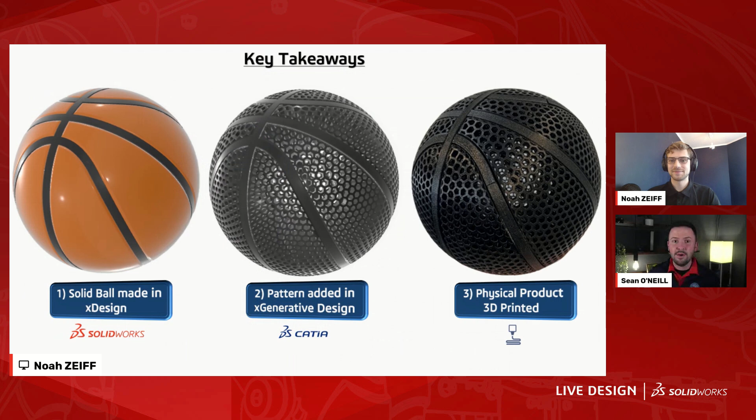So we're going to spend about 5 to 6 minutes per takeaway. But let's get to your first takeaway, designing the basketball here in X Design. But again, a lot of the stuff I'm sure you'll talk about is also applicable in SolidWorks. So yeah, let's take a look at this first key takeaway and see what you had to show us here. Let's do it.

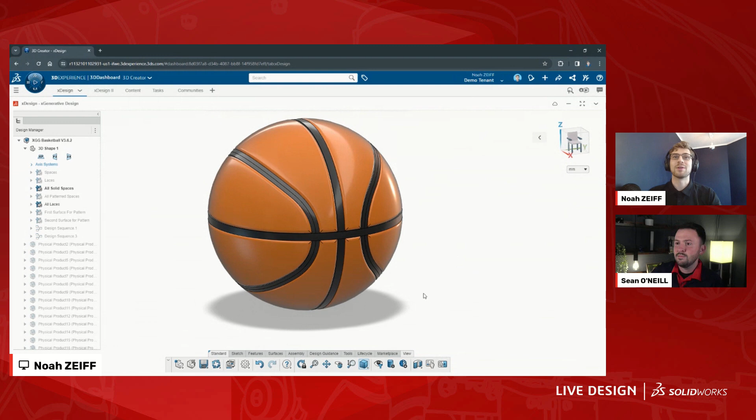So here we are in X Design, again, our fully cloud-based modeling tool, so no download required. And this is a parametric modeling tool, which means it has a lot of overlap with SolidWorks, meaning you have those extrudes, those revolves, those fillets, and many other familiar tools. Now, to use them to design this basketball, it honestly wasn't too crazy. This is a pretty simple shape. It's got a lot of symmetry to it.

In fact, all I really had to do was model up this small portion of the ball and just mirror that over a bunch of times until I got the design I liked. So that was pretty simple from the outside, doesn't look like much. But if we pan around and look at how these pieces connected, how I tried to do that, it got a bit more complicated.

And if you're watching this and you're kind of confused, you might be thinking, well, I've seen people 3D print this basketball. They always do it as one piece. And that's definitely true. I tried to challenge myself here and do it in pieces for two different reasons. The first was I wanted to see if I could print this basketball with absolutely no support. So I was using a flexible material to see if I could get this thing to bounce.

And I was using a single extruder 3D printer, which meant all of my support material would have to be in the same material as my model. And if you have flexible support material and a flexible model material, trying to break those away, it's like trying to pull apart two rubber bands that have been glued together. They kind of just stretch apart. They don't break away. So that was the first post-processing step I tried to avoid.

The second reason why I went this route was build volume. I wanted to make these files public, and so I wanted to see even if people with smaller 3D printers could split these parts up even further and print the largest basketball that they could, get it as close to the real thing as possible. So those are my two reasons why I printed in pieces.

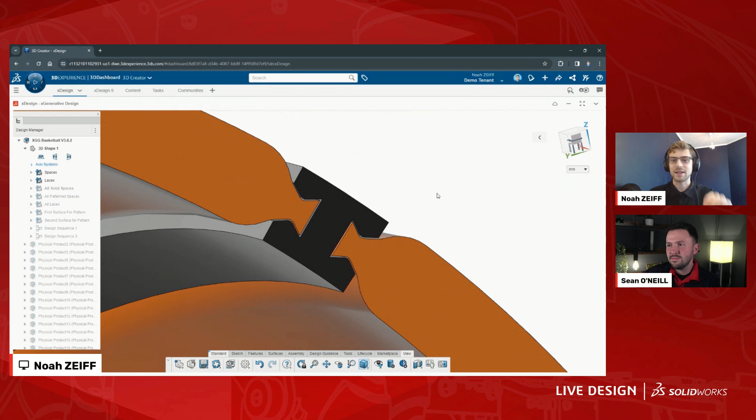I also had constraints when it came to designing these interlocking mechanisms. Yeah, this seems very interesting. Yeah, the first constraint was I wanted no glue. I didn't want to get messy and have to buy some really expensive, what is it, that Krazy Glue that is really good for 3D prints. I wanted to just make these snap together, make these fit together, as easy as possible. So that was the first constraint.

The other constraint was all of these pieces needed to have a flat bottom surface so that it could stick to the build plate of my 3D printer really well and it wouldn't get knocked off. So for these orange pieces here, I made sure to have this flat bottom piece that could stick to the bed. Same for this one. And for these laces parts, I used these as the bottom faces. I could have printed on either side. There would have been an overhang in the middle here, but I made sure that that was a short enough distance so that my printer could bridge it without needing any additional supports.

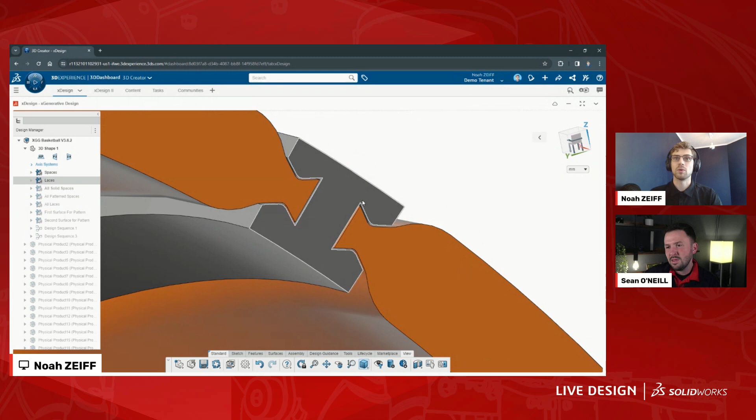So that was really kind of a driving factor throughout this first takeaway: having my manufacturing method in mind as I was designing this. In this case, 3D printing was my manufacturing method. So DFAM, design for additive manufacturing, was the biggest thing throughout this first takeaway. Yeah, and this isn't the one in the thumbnail, right? This is like a standard basketball. You wanted to get to this one first, as you mentioned.

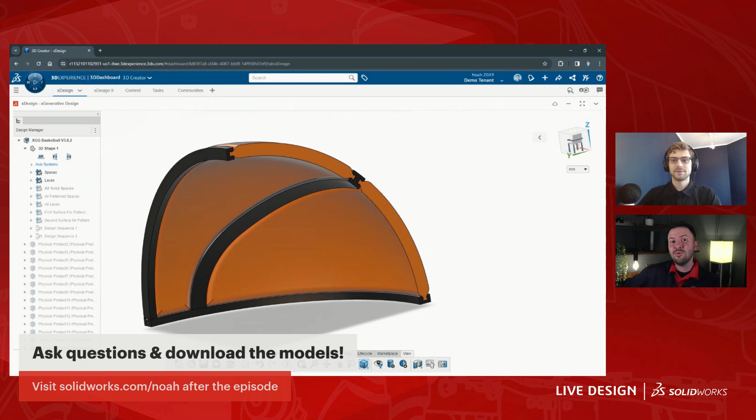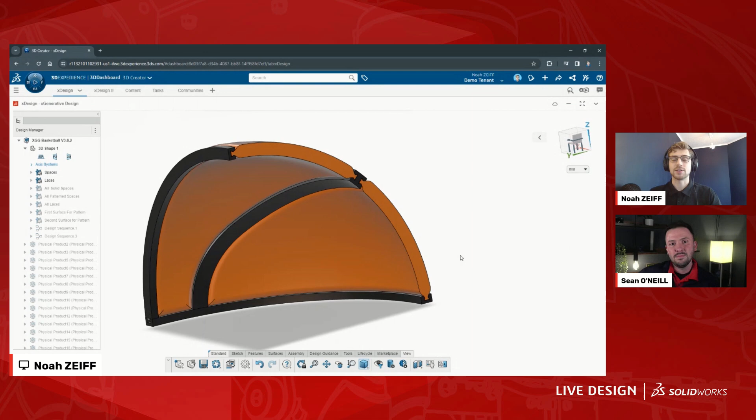Let's actually get to your second key takeaway, which, Noah, we've mentioned it. It's very inclusive inside of the thumbnail and the marketing for this episode, and it's actually adding intricate patterns to your designs. I think this is one of the biggest takeaways, honestly, of this episode. Definitely. So like you mentioned, Sean, I added all these patterns using a different application. It's also fully on the cloud, and it's called X Generative Design.

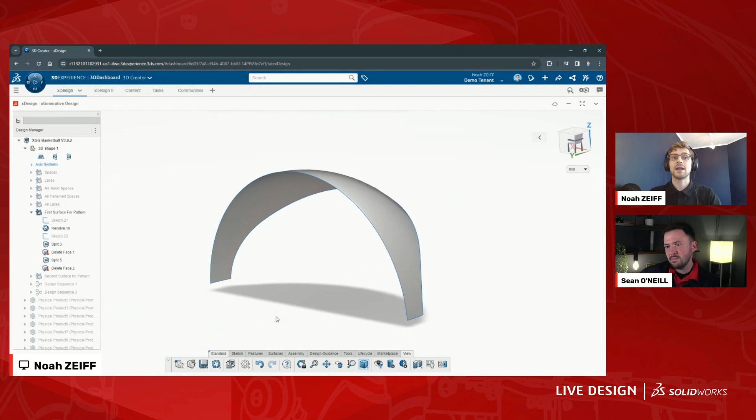Okay. And the great part about it is it's connected to the regular X apps like XDesign, XShape, and others. So I can take geometry straight from XDesign, like this pattern here, for example. So this was made fully in our parametric tool XDesign, and I could bring it right into X Generative Design through an app switch. So that's kind of the beauty of the platform, bringing all of these design tools together. And the reason why I'm doing this is because with this new app, X Generative Design, I have the ability to design algorithmically. And you'll see this is very different from typical parametric software like SOLIDWORKS or XDesign.

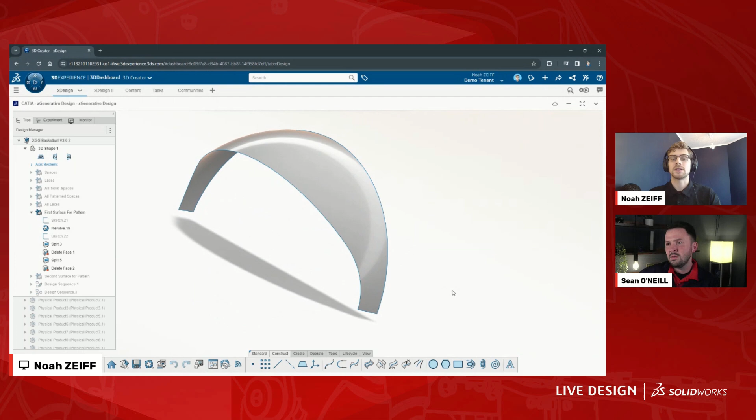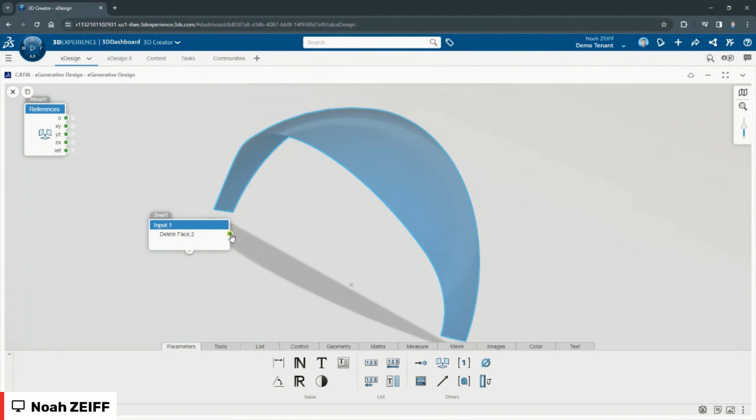Basically, I can add a design sequence, which is going to act as kind of our design manager, where we can house all of our features. And then I can do things like insert nodes, which are similar to features in SOLIDWORKS. And I can have this input node point to our surface. Mm-hmm. And then we can do cool things like add a triangulate node.

And what this is going to do is it's going to split up this surface into triangles based on a length I specify. So I'm going to say 10 millimeters. And just like that, we have split our surface. And for any SOLIDWORKS users watching, you can imagine how long this would take to do in a regular parametric software, how many sketches, how many lines, how many constraints you would have to make.

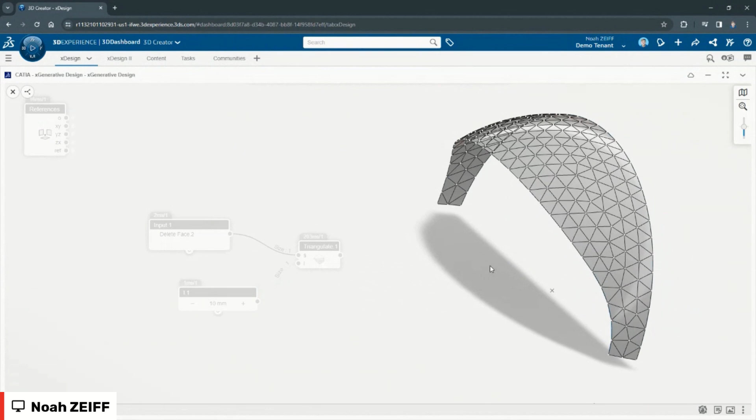So that's the beauty. Yeah, just to give like a few seconds of commentary. I know you aren't necessarily saying don't use SolidWorks or only use this tool for your designs. You would never only use this tool for your designs, but for certain architectural applications, certain, as you see here, Voronoi patterns, certain very pattern-rich, intricate designs, like we saw with Bowhead Corporation during our What's New launch, those sort of intricate handle designs.

In SolidWorks, you wouldn't be able to do this quickly, and again, algorithmically. So it's an interesting way to design certain parts, certain subsystems for sure. And these end parts can be put into SolidWorks models as well, which I think is really cool.

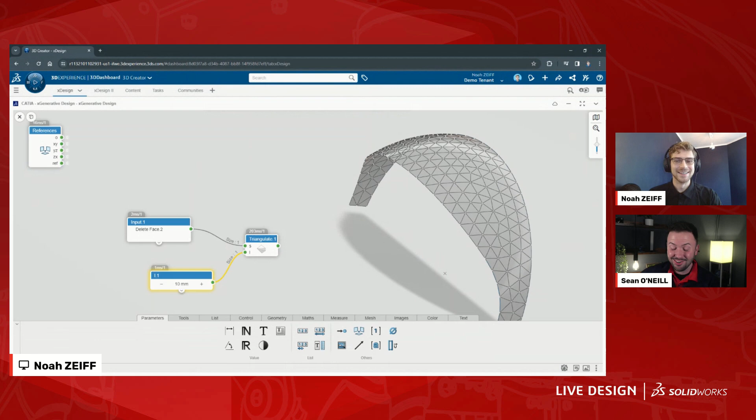Yeah, that's a great point, Sean. It reminds me of, I'll shout out Darren Grosser from GoEngineer, because I attended his session at 3DEXPERIENCE World, and he used this tool, and he says, you can do this in SolidWorks, but should you do it in SolidWorks? It's a good question. You know, it would take long. Yeah. So that's the beauty of algorithmic design.

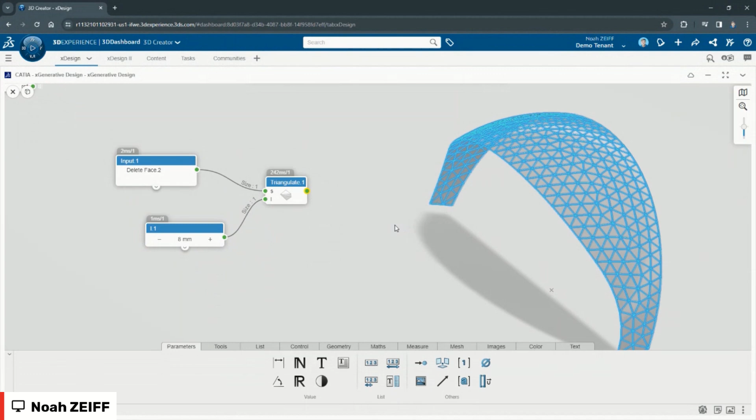And if I wanted to change this to 8 millimeters, you could see it updates pretty snappy. So like you mentioned, Sean, it's just a good enhancement for your regular parametric tools. But there are parametric nodes right here in xGenerative Design. So I can use the fill command, and I can fill all of those triangles I just made. I can also assemble them and bring them together as one mesh.

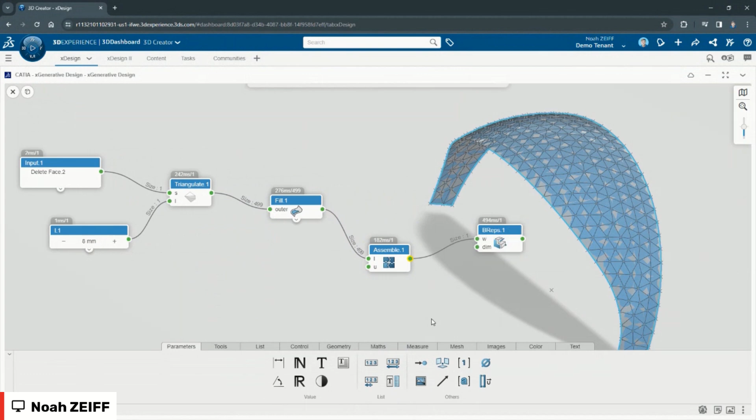And one of the other really cool things about algorithmic design is I can highlight sub-elements, which means I can highlight all of the faces, edges, and in this case, vertices of our geometry. So I'm going to take our geometry so far, put it into this sub-element. And now since I've highlighted all of the vertices, we can see just the vertices have been created. And now we can actually reference those to make our Voronoi pattern, what we've seen in the thumbnail.

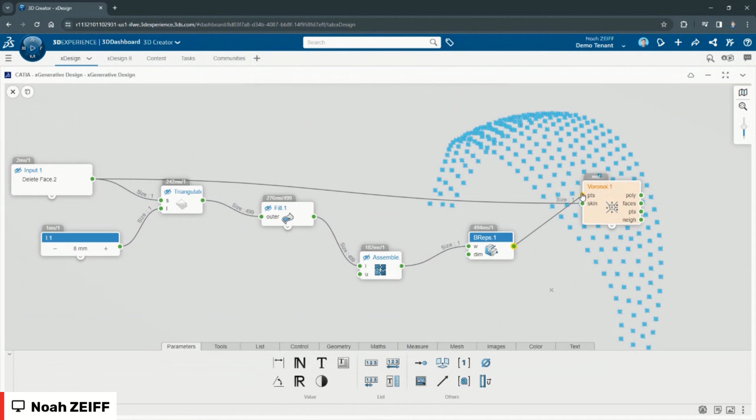So I'm going to create a Voronoi node. This is similar to basically making small hexagons at each one of these vertices. And I'm going to generate them on our initial input, which is that surface. So for our skin, that's going to be the original surface. And for these points, it's going to be all the vertices we just created. And now we have the beginnings of our pattern.

That's awesome. And it's following that same surface, which is one of the hardest things to envision modeling. If you come from, like a lot of us do, a parametric way of doing things, a very ordered chronological way of adding little shapes here and there and cutting away at them. It's a very simplistic idea of what parametric modeling is. But yeah, that is super awesome and easy to update as you switch in and out of these modes. That's really cool.

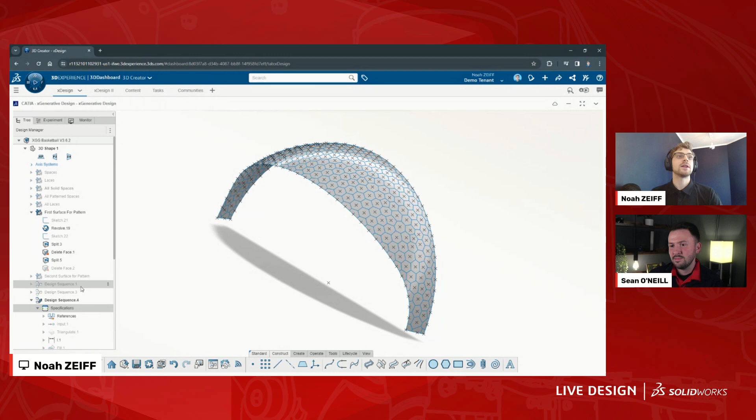Yeah, and like you said, it fits exactly to the geometry surface that we inputted. These aren't all the same exact size hexagons. They're smart enough to realize we want to fill out as much of the surface as possible. So it's really handy there. And that was honestly really all I did to make this pattern. From here was a lot of thickening, a lot of Boolean, similar parametric tools that you can do inside of xGenerative Design. And I was left with my final design sequence, which looked a little something like this.

So what I actually did was I made a negative of this pattern, and I subtracted it away from the solid spaces. Oh, that's neat. So you actually did use the initial state that we looked at in a Boolean subtraction operation. Exactly. My background is in parametric modeling, so I'm still trying to cling to that design methodology, even with this new complex patterning software. So I cut this away from the original solid surfaces, and this is what I was left with.

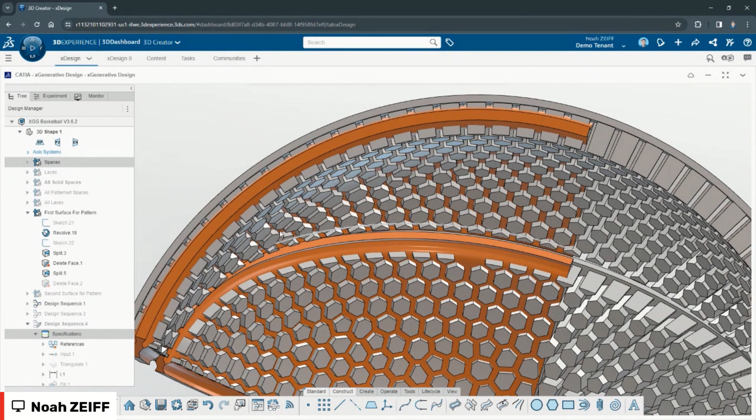So these are all our patterned surfaces. That is awesome. That's so cool. I had so much fun rendering this for the thumbnail of the episode, by the way. It's just such a cool looking model.

Plus one, everyone in the chat. I see a bunch of you making funny basketball puns as well. So I want to give you guys a shout out too in YouTube chat. So try to keep things tight, concise, and informative here, but still having fun.

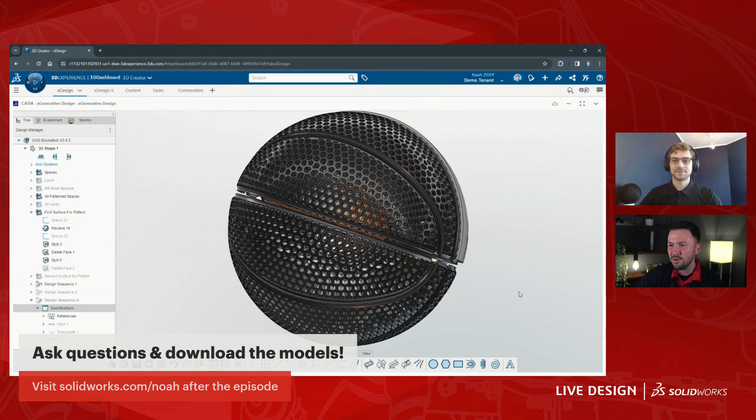So we want to get to, I think that's all you had for the second takeaway, right? We're going to get into the third one here, Noah? Yep, that's exactly it. Awesome. And I believe the third one involves printing the basketball, how you actually printed the end result basketball that you created, right?

It is. This was definitely the most exciting part, but it also required the most patience. Tell us more. So each one of these pattern parts took around 9 hours to print. I had 8 of them, plus there were a bunch of pieces for the laces. So in total, it took around 80 hours of printing. I had 2 machines running, so it took 40 hours, so about 2 days to get this first basketball.

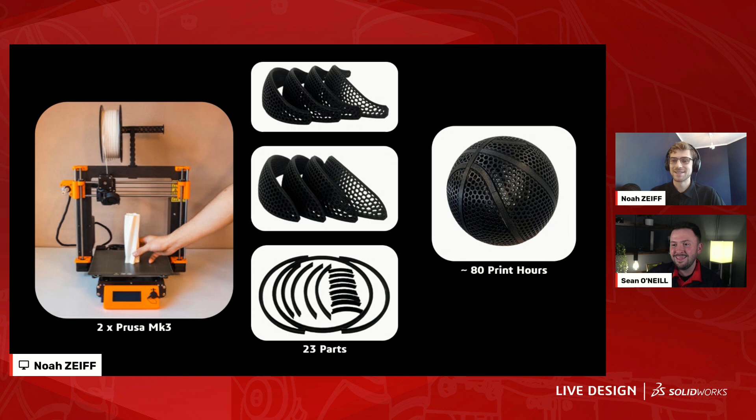I used standard FDM machines here. You could get these for a couple $100 nowadays. So for the price of one 3D printed Wilson basketball, you could get like three 3D printers. And the material as well was really accessible. I used standard flexible TPU that you can get off Amazon for around $20. And I chose this specific brand because my Prusa 3D printer already had a profile for it, so I didn't have to tweak it that much.

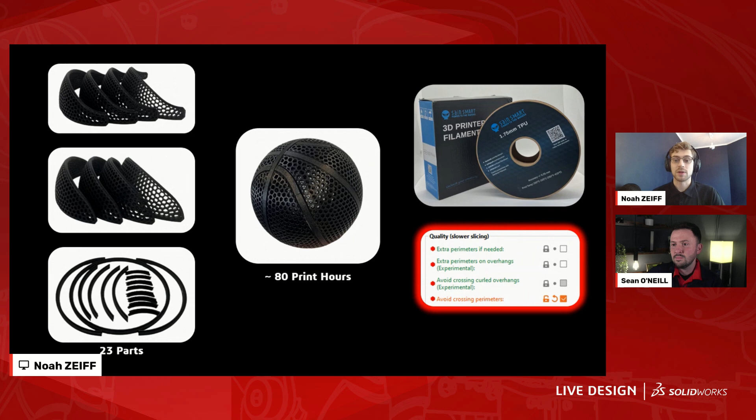In fact, the only setting I changed was this one I highlighted in red called Avoid Crossing Perimeters. If you've ever printed in TPU before, you know that it can be a very stringy material to print with. It can kind of glob up on itself and leave artifacts on the surface. So leaving this setting checked on, I found helps with a lot of that, and it leaves a better outer surface finish. But other than that, it was relatively easy to print in.

The flexible material also made it easy to assemble because with that interlocking mechanism I showed earlier, those walls could kind of flex in and then snap into place. And while that worked really well and the ball was able to stay together initially, once you tried to bounce it, it wasn't quite as sturdy as I'd hoped. I'll show this first experiment here. Okay.

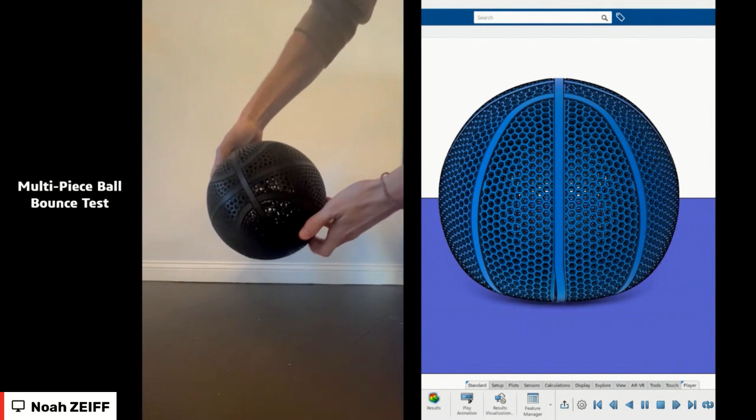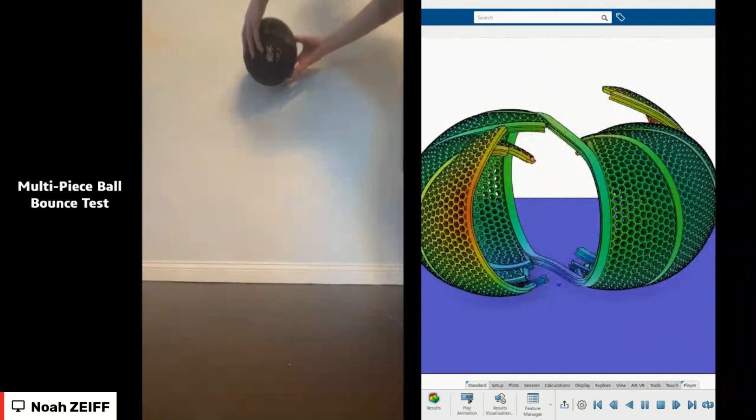You can't hear it on this video, but I'm laughing very hard in the background. Yeah, that doesn't happen with this basketball that I showed earlier. No, not typical. Also, shout out to Shreyas, who helped with this awesome simulation. That looks awesome. That's super detailed. That's basically showing you what your eye actually can't see, and I'm sure the deformity has been scaled up for illustration purposes, but that's really cool.

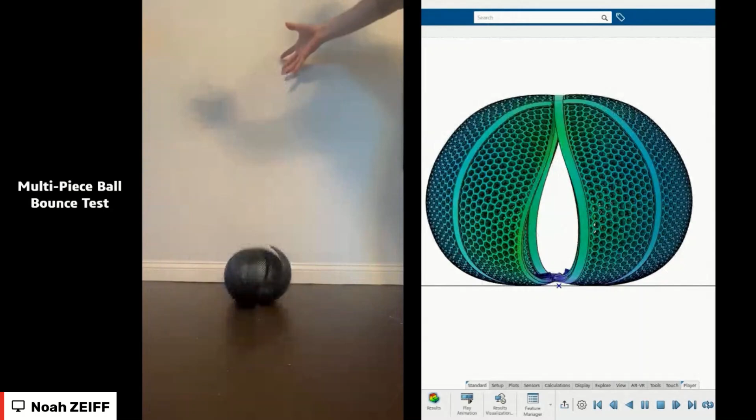Yeah. Our colleague Michael Steves actually just pointed out this basketball has a really cool feature where when you bounce it, you get to see the exploded view. Wow. Yeah, really appreciate that. The CAD community never disappoints. Shout out to Michael.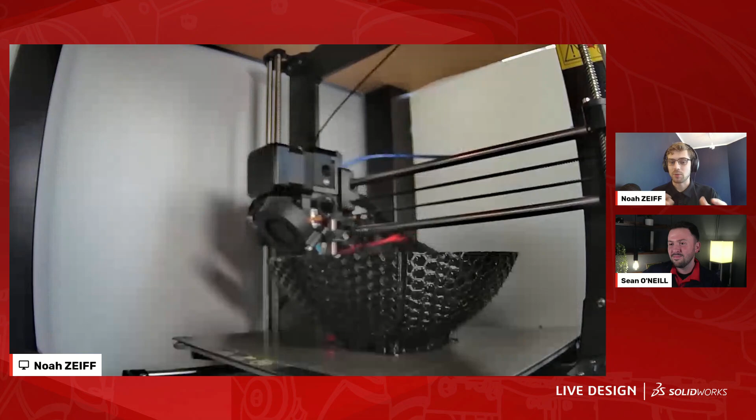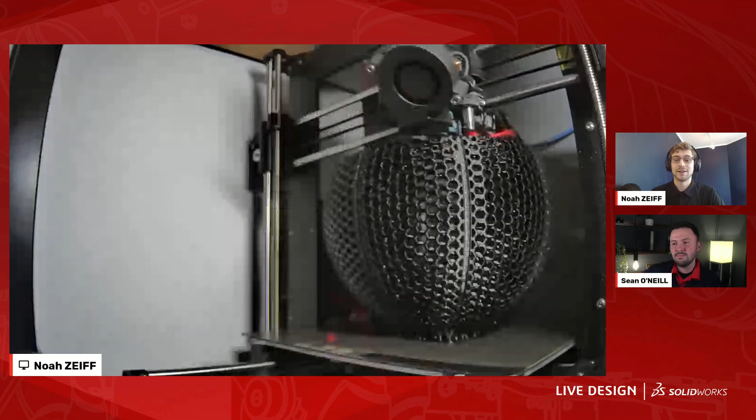But still, I wasn't going to give up that easy. My next try was probably the more traditional method, printing this as one part. So I redesigned it again with xDesign, making the solid ball, adding the pattern in xGenerative Design. But this time I combined all the pieces. And in order to print this, I did have to go against my initial constraints and add supports. And this took around 70 hours to print. So essentially just as long as it took to print the other basketball in pieces.

And the results came out looking better than I expected for the most part. The top especially, I was worried because there was no support underneath that top section. But it honestly printed pretty fine for the top. It was the bottom part where all of those fears I had about TPU came true; peeling that support off the bottom, it came off kind of gunky.

I used organic tree supports to print this. If anyone in the chat knows a better support setting to print TPU on a single extrusion machine, please let me know. I'm definitely open to learning more because there was definitely room for improvement on this bottom surface.

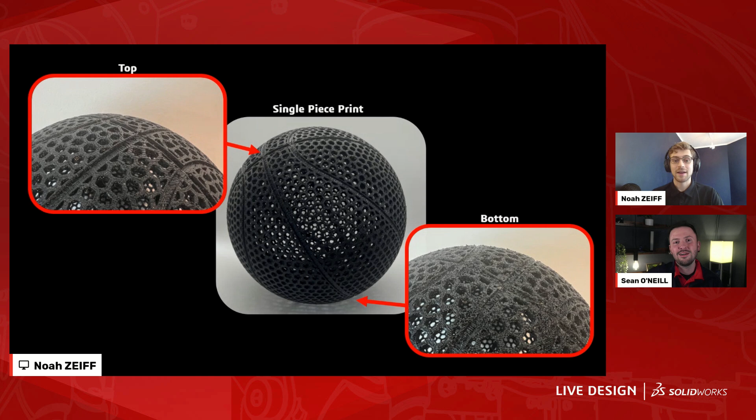But overall, it was a success. It printed as one piece. It won't break apart. TPU is a very durable material. And the bounce test was a lot more promising, as we'll see here. So it had some bounce to it. A lot more promising. Yeah.

Look at you. You're gonna hit us with the Jamal Crawford double crossover in a second.

I wish. But yeah, so overall, that part was a success. And even though I didn't get the performance I wanted with the first attempt, I was able to accomplish the original goal, which was print a fully airless basketball with no support, no glue required, and have this cool hex pattern.

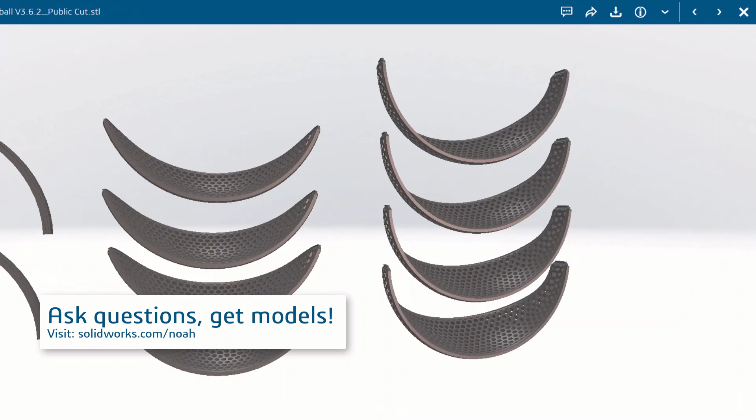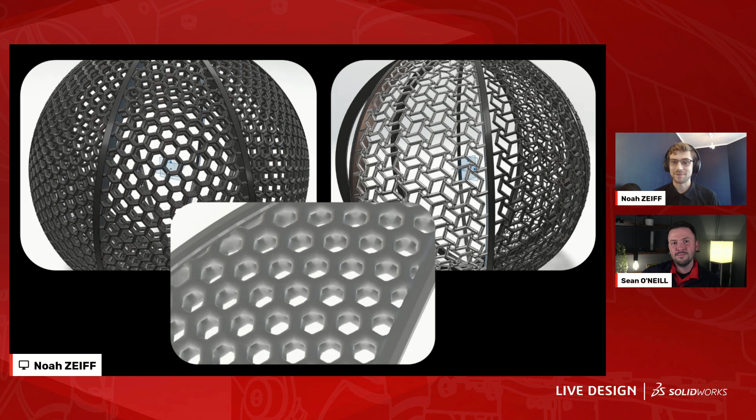Actually, as I was doing this project, I reached out through the platform to get some help on xGenerative Design. And it turns out other CATIA people have been trying to replicate this geometry as well. So I'll shout out one particular person on the CATIA team, Vincent Manier. I hope I'm saying his name right. He made some really complex patterns with this ball that include 2-layer lattices, which are actually close to the original design. And he also informed me that the original designer of the Wilson basketball is a CATIA champion. Oh, wow. That was pretty cool to hear.